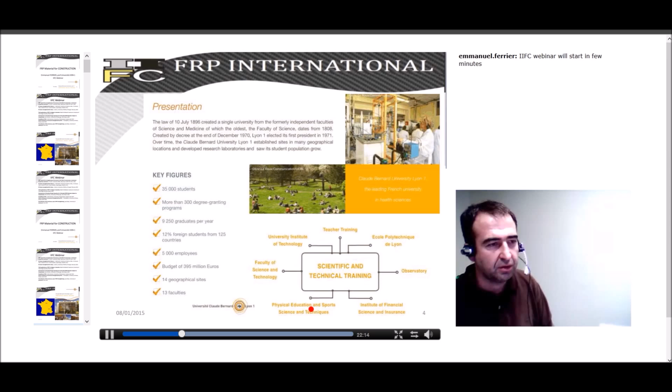About our university, we are located in Lyon, in the southeast of France. It's a quite big university in France with 35,000 students. Essentially, the university is well known in the field of health, less in the field of technical. There are some international opportunities in our university, and a lot of possibility for funding, essentially for European people, for example. So keep this in mind if you are maybe interested in visiting us.

About our lab, we are a small team. I'm in charge of this lab. The team is made of 11 persons, essentially associate professors, and we are working only in the field of FRP material for construction. Today I would like to speak about FRP material at first, about mechanical properties. I will try to go quite quickly on this part, and to focus more on bond issue and try to make a small literature review and give you some new results we have on this topic.

So to start with FRP, I think that we have a small community today. You are all aware about FRP systems used for shear strengthening, flexural strengthening, confinement. These materials are well known in the field of construction nowadays, essentially to protect old structures or to upgrade structures that need new strengthening because of overloading. It can be used also to solve some problems about design mistakes, for example. And for seismic application, there is also a good application to make structures more safe.

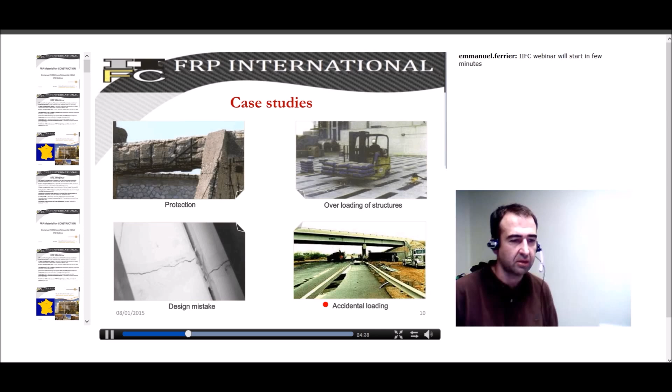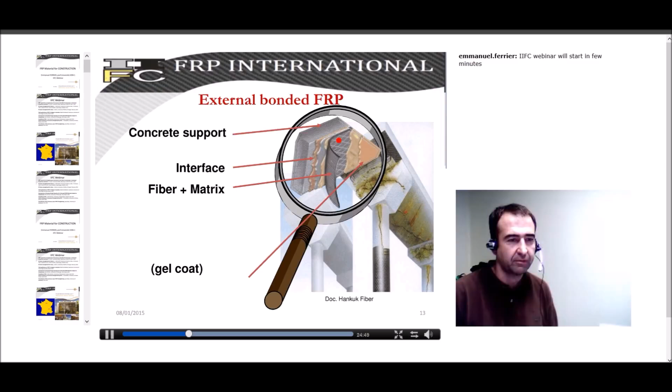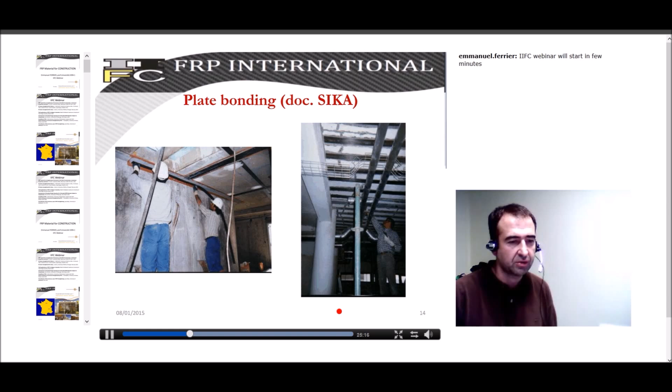So generally when we use FRP, it's unidirectional fibers bonded onto a support using a polymer, but I think you are aware about this. This technique is well used in a lot of countries, and in France there are about 7 to 8 companies that apply about 50,000 square meters of carbon fibers each year, essentially in buildings and a few applications also on large dams and bridges. We have some photos about this kind of application, some large machines to apply the polymer and so on. So this is only an example in France.

So about FRP materials, I will try to go quick on this part because there are not so many people connected.

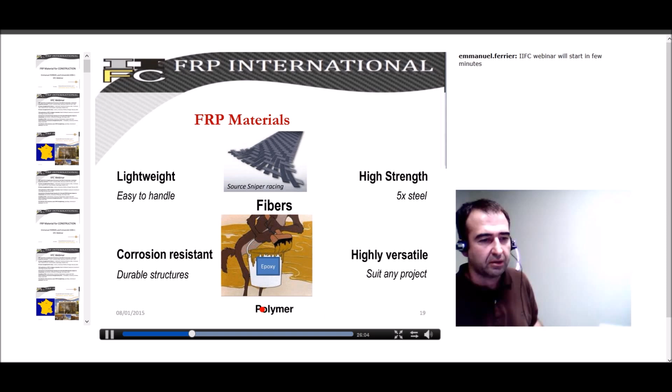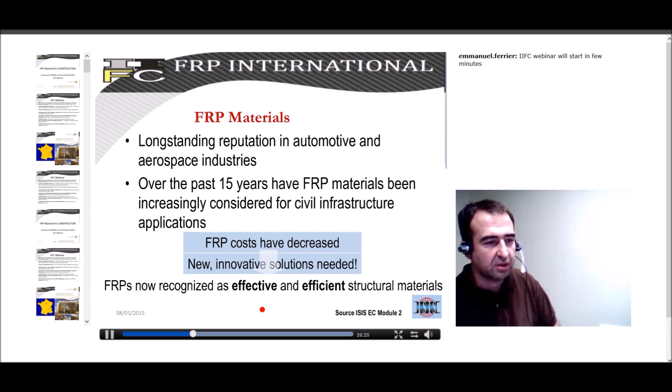You all know that FRP materials are light, high strength, corrosion resistant, and can be used on all surfaces, which makes this material very useful in the field of concrete structures. These materials are well known in other industries, such as automotive and aerospace, and the development of this material has grown higher each year for about 15 to 20 years, and now it's quite common in the field of construction.

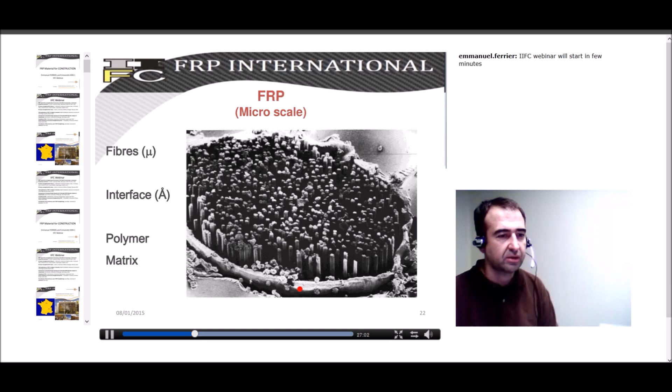FRP material is made of fibers, mainly carbon, because people started with these fibers, but also glass and a few examples with aramid fibers. The matrix is essentially epoxy, and the material you get is made of a lot of small fibers that play the same role as steel rebars, but with lighter properties.

So about the fibers, you may know that carbon fibers, high modulus or high strength, are commonly used. Generally, if we compare this to steel properties, the main issue is that we have a higher tensile strength, but a lower Young's modulus.

And for this reason, the first fibers that have been commonly used are low modulus carbon fibers. Nowadays, for some specific applications, e-glass, even if its Young's modulus is lower than steel, seems to be quite good to dissipate more energy, and we'll see this in some large applications about seismic retrofitting, for example.

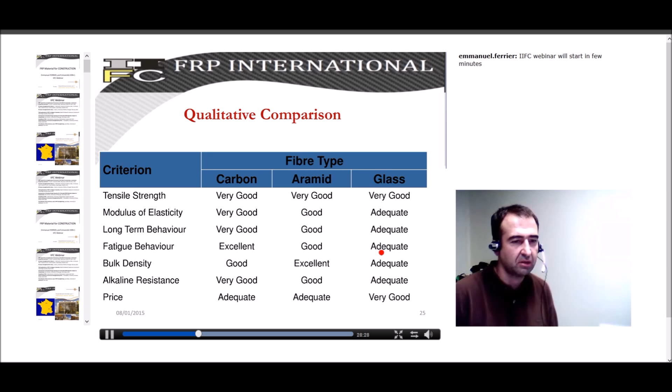If we look at these three kinds of fibers - carbon, aramid, and glass - carbon has very good properties for all the mechanical and physical properties we may look at. Glass is also good, but the problem is the low Young's modulus of this material, along with long-term creep sensitivity and fatigue, which is less effective than carbon.

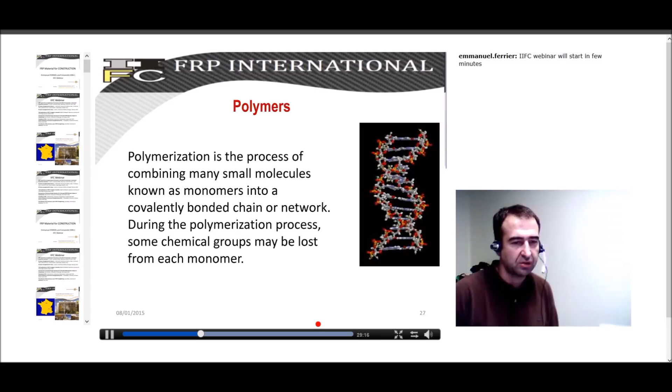So about the polymer we use - polymer is a specific material well known in the chemistry industry, but generally in our field it's less known. A lot of misunderstanding occurs because polymer needs to be handled very carefully and specifically. There is a polymerization process that should be clearly understood. It's like concrete - we need some days, specific temperature, and specific humidity to get the perfect chemical reaction and the good material at the end.

The main typical property people need to understand is the temperature sensitivity of this material. If we compare this to concrete, we know that concrete is full strength and full hard once we mix cement and water, and the mechanical properties don't really depend on temperature. In this specific case, temperature changes the mechanical properties of the polymer.

You have a range of temperature where the polymer is thermoset, with a glassy plateau where the mechanical properties, essentially Young's modulus, are constant. Then there is a decrease to get to the rubbery plateau where the properties exist but are very low, much lower than the initial one.

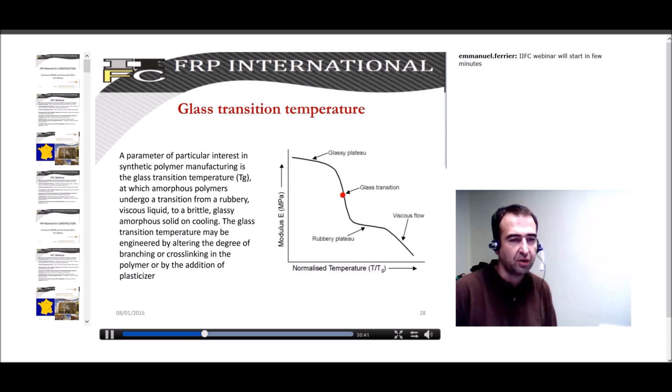This may be compared to the material used, for example, to build a road - material coming from the petroleum industry, and it behaves in different ways depending on the temperature. So we identify a value, the glass transition temperature of the polymer, corresponding to the value where the mechanical properties decrease.

So a common thermoset polymer used in our industry is epoxy, used for wet layup applications of laminates and dry fibers. It's a very good material for adhesion and bonding - we'll see this in the second part. Vinyl ester is also used, but more to build FRP rebars and for thermoset applications. It's less expensive, and used for building FRP by pultrusion.

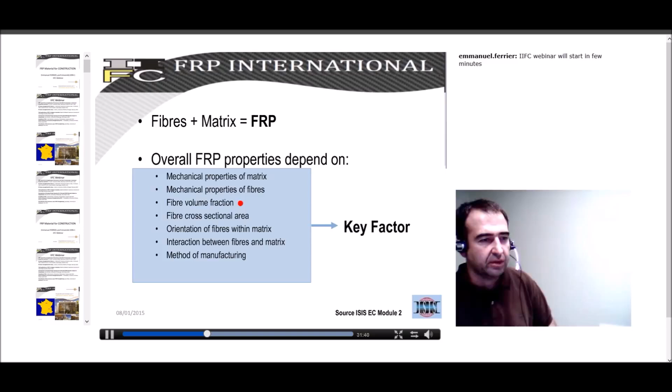So FRP is a mix of fibers and matrix, and the mechanical properties of FRP will depend on the matrix, as I mentioned, on the fibers, but also on the amount of fibers in the mix and the adhesion. So if we look at the mechanical properties, you have to understand that the mechanical properties of UD fibers are given, and you can have very good fiber properties.

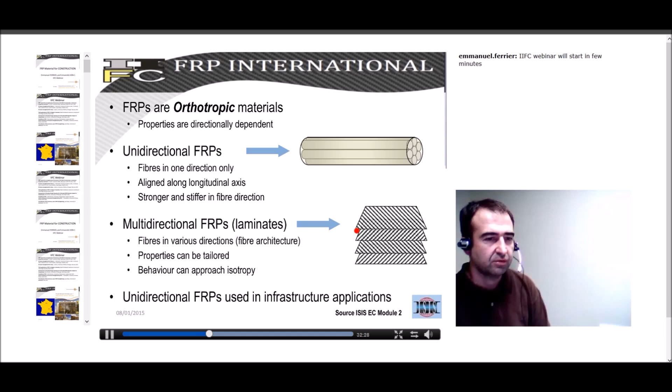And then you will have two things to understand: the fibers are bound together, so there will be the issue of physical and chemistry properties of the surface and the interface between the fibers and the polymer. And then you have the laminate, meaning you will have a lot of layers, and all those layers have to bond together perfectly.

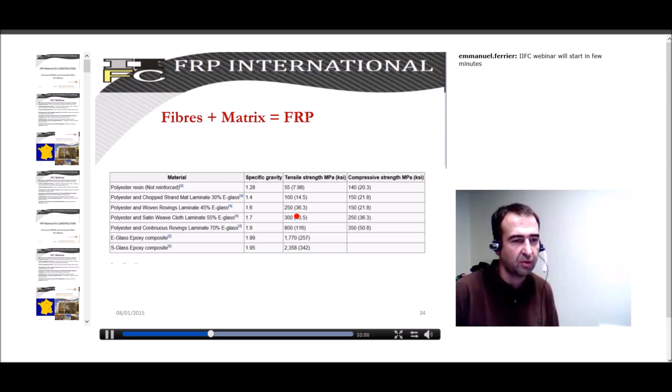If we look at the mechanical properties of the resin, you can observe that generally the laminate and the mechanical properties of the FRPs essentially depend on the mechanical properties of the fibers themselves. This means that polymers are just there to make sure that all the fibers are bound together and that all the fibers work at the same time in tension.

So those materials are applied by the wet layup method. Dry fibers are bound onto the support, and an epoxy polymer is used to impregnate the fibers. It can also be bound using polymers.

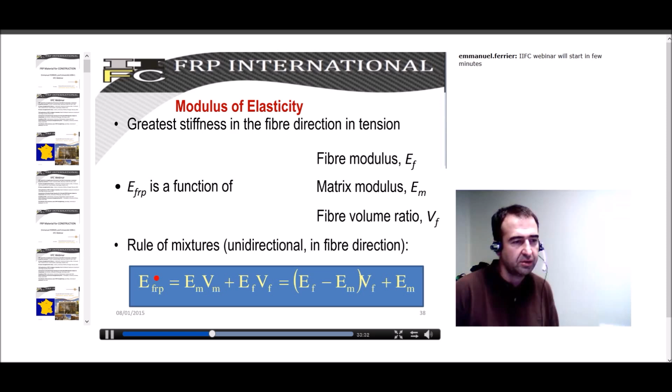About properties, as I mentioned first, the Young modulus can be easily calculated using mixture properties. This means that your final properties will depend on the matrix properties and the fiber properties. If we compare the Young modulus of the matrix and the fibers, you can observe that even if we have 70% of the FRP made of matrix, the mechanical properties will essentially depend on this ratio - for example, carbon fiber Young modulus is nearby 200,000 megapascal. If we compare it to a usual epoxy, it's only 3,000 megapascal. So the difference is nearby 100.

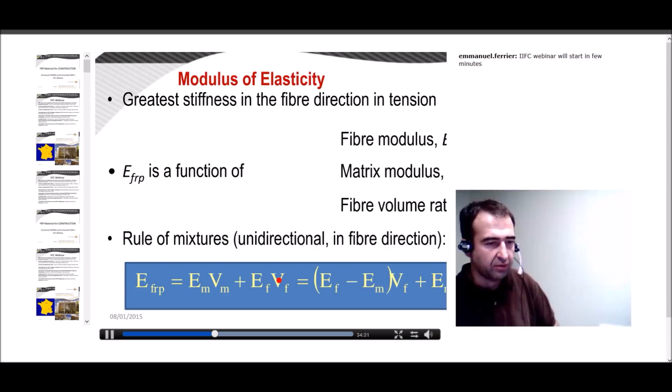So the mechanical properties of your FRP will depend on this value, and of course this one too. If your ratio is very low, your final properties will be very low as well.

So then, generally we identify the mechanical properties assuming perfect bonding between the fibers and the matrix. This is not often the case - there is some problem in certain cases between matrix and fibers. This is well known and well identified, and it's quite common now to get a very specific treatment of the fibers so that there is a very perfect bonding between these two, allowing you to calculate mechanical properties considering usual elastic properties of all the constituents.

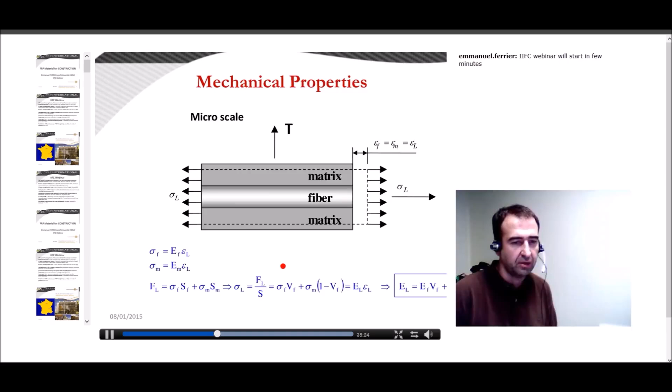Then about shear - when a fiber is fully impregnated by the matrix, there is a bond issue between fibers, and there is a strength property to identify: the shear strength that can be developed around fibers, to make sure that two layers will be fully bonded.

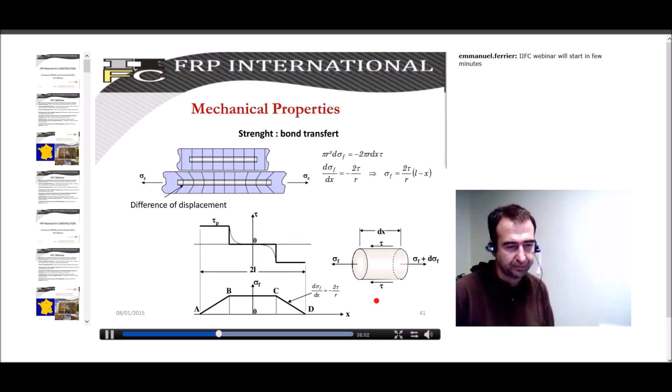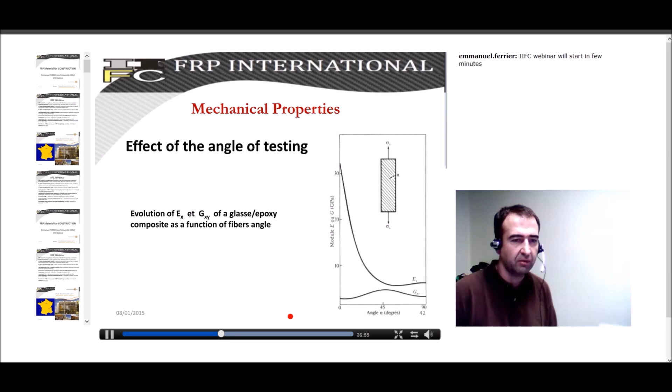Another thing well known in this field is that when we use unidirectional FRP material and test it in another direction, we rapidly lose the mechanical strength for a very, very low angle. The decrease in Young modulus or strength is very high, so this material should only be used in its own axial direction and not another, which can be a problem mainly for a full FRP system. But in case of strengthening, generally the fibers are bound in the direction where the force is applied.

So to sum up the mechanical properties, you have here the stress-strain relation in tension of fibers and matrix - I mentioned there is a big difference. If you clearly observe, you can see that the FRP material will have a final property that depends on the amount of fibers and matrix you put in, and also the initial properties of both.

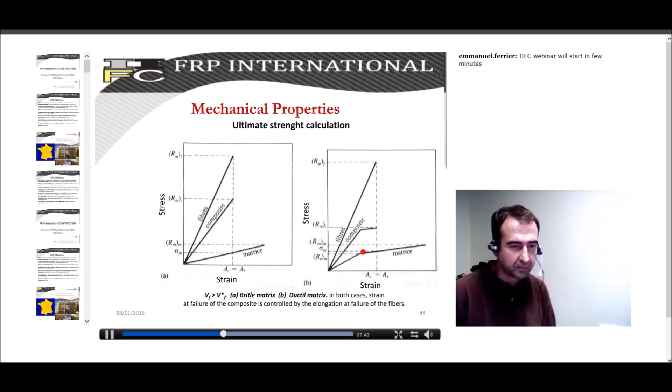For nonlinear behavior, some developments have been done in this field recently. This can be obtained depending on the matrix properties, but also on mixing fibers with different behavior.

For testing material in our field of construction, it's quite well identified now. Generally everybody uses this ISO norm for tensile testing. There is also an ASTM standard, which is a little bit different in its sizing but quite similar in principle. Coupons are made of unidirectional material, and then tested directly in tension.

Some people ask about the durability issue of these materials, and this is a result coming from our lab testing. We got questioned about FRP durability from the French nuclear agency, EDF, who were wondering about using this material for strengthening some big buildings and chimneys in nuclear power stations. They asked us to make some tests with quite difficult weather conditions.

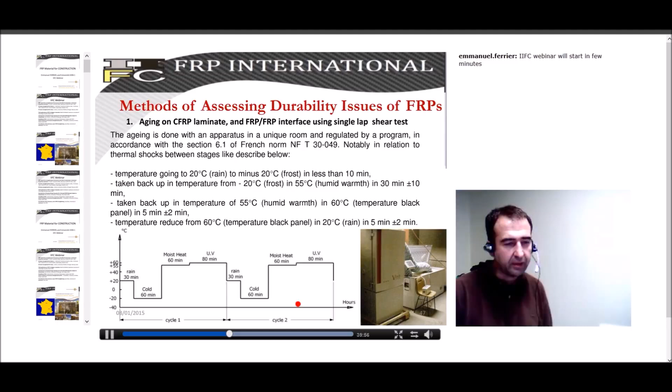At first there is full water immersion for 30 minutes, then freezing at about -20 degrees for an hour, then heating to 60 Celsius degrees, then UV exposure, then rain again, cold, heating with moisture, dry heating - repeating this cycle 300 times. This is, I think, the only norm I found for accelerated testing of this material. It's commonly used to test painting material, and we have used it for several FRP materials.

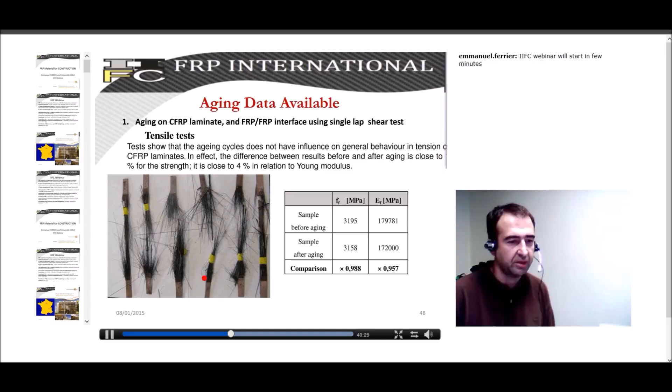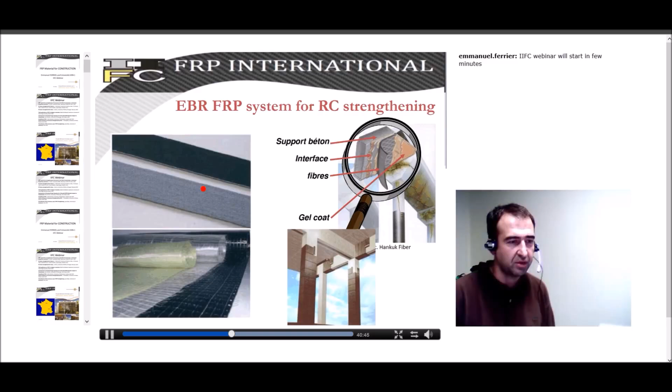What we found is that if we compare the ultimate strength and the ultimate Young modulus, we didn't find any modifications on the coupons we tested in the lab. We made about 100 tests and didn't notice any difference before and after the aging, and the aging was quite difficult. Brahim Benmokrane will introduce some durability issues about this, and we are quite confident on the durability of the FRP itself. But as I mentioned, this material is bonded onto a support, and generally it can be bonded with two types of material: laminate material, prefabricated, or different sheets directly bonded onto the support.

So now the issue is not only to test the material, but to evaluate how it will be applied on the support, depending on the worker applying this material and the weather conditions, and so on. We are worrying about how to identify the mechanical properties of the FRP onto the concrete.

So this is the next step of my presentation about the bond issue. Bond is important for a beam because when you strengthen a beam with FRP for flexure, this can only work if perfect bond adhesion between the FRP system and reinforced concrete is assumed. It means continuity of strain between the steel and the FRP. Another important issue is that at the end of the FRP system there should be no debonding, because if there is debonding of the laminate, the system won't work anymore. So bond onto the concrete substrate is very important.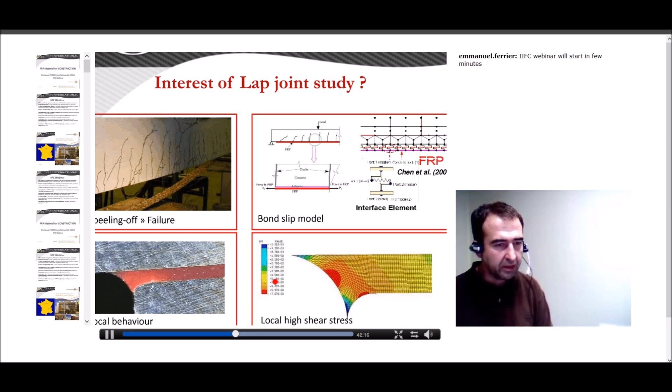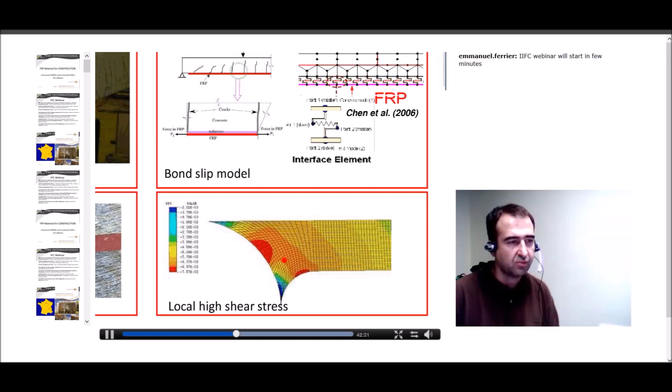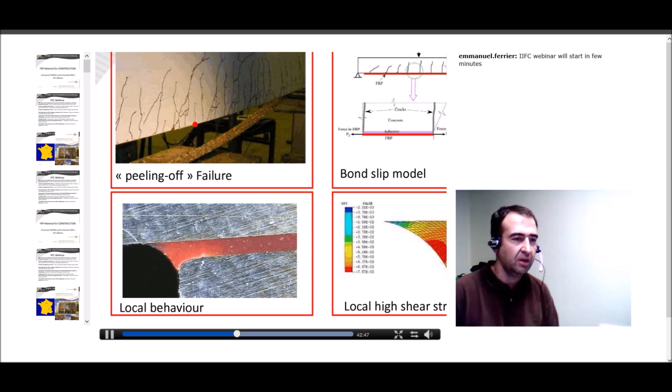About this, there has been a lot of development. This comes from the aeronautic industry and mechanical research - we know that at the end of the lap joint there is important stress, essentially because we have two different materials bonded together with different mechanical properties. This image shows that shear is the main issue and the main problem, and this shear, generally in reinforced concrete beams, is known to cause full delamination or peeling off of the structures.

In order to identify this, there has been a lot of development and modeling to try to understand how this interface behaves and to identify its mechanical properties. This is the next step of my presentation - I will show you how researchers try to find and identify the mechanical properties of this interface.

Since 1992, the first research developed this kind of compressive shear test. This test has completely disappeared - we don't find it anymore.

We have some single lap shear tests. It's quite commonly used, but it's quite difficult to apply in certain cases because you can have flexural behavior, and the mechanical properties are quite difficult to obtain.

Then Täljsten, for example, developed this kind of single lap shear test. The sample is connected to a block, and a compressive force is applied here and a tensile one here, so that shear develops in the interface.

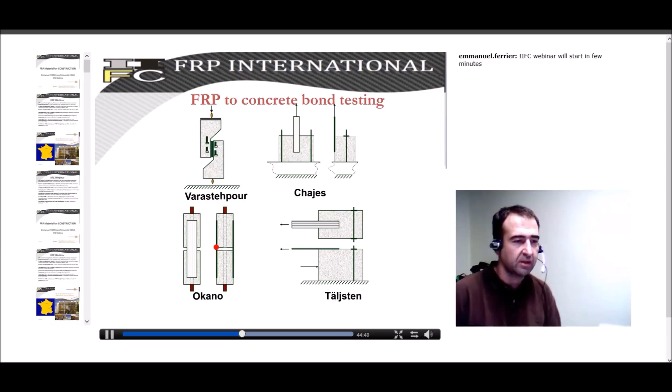Another common test is the double lap shear test. Two concrete blocks are connected by FRP material. Then tensile stress is applied onto the concrete, and due to the tensile force developed in the FRP, you get shear developing in the interface.

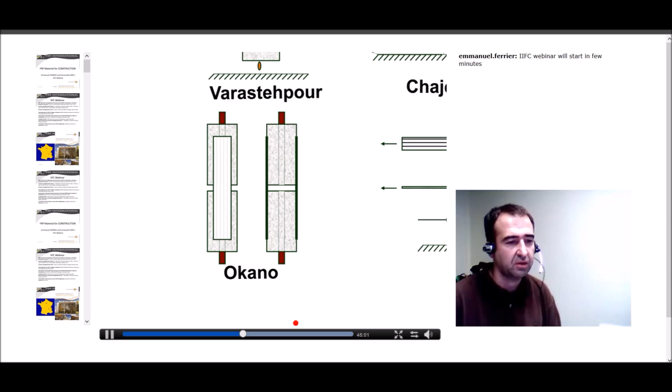The first author that used this test was Okano in 1995. It's quite a long time from now, and this kind of test has been widely used by other authors.

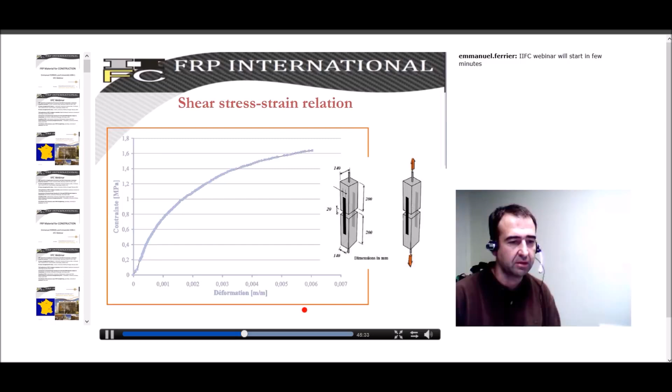Going back to the literature review, the first test reported in papers was from Täljsten in 1997. This was the single lap shear test I mentioned, and the test was developed for FRP bonding but also for steel bonding - at that time steel plates were still used for reinforced concrete strengthening.

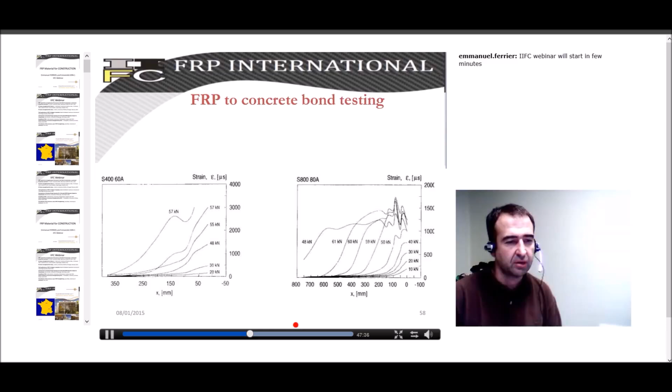You can observe the author catching the debonding here, where the full stress was developed, and this whole zone is debonded, leading to failure. But in the elastic stage, the bonding length is not so long - we only need 100 to 200 millimeters to bond this material onto the support. This is mainly due to shear transfer. There are also some old studies done mainly in the field of aeronautics, by authors like Volkersen or Hart-Smith.

When we use a very basic equation, shear is due to difference of displacement with two materials, steel and concrete for example, and the angle of rotation is commonly known as the shear strain. Basically, you can write those equations with equilibrium between two sections, and this allows you to calculate the shear stress depending on the length.

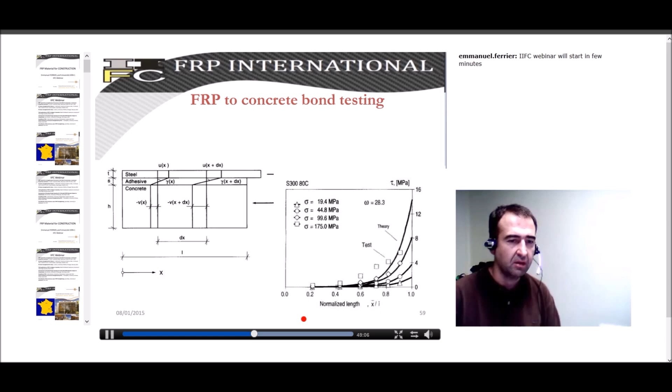If you do this calculation and compare it to the strain, it's very well developed in the field, in the paper from Täljsten. You can observe that you have a very important shear stress decrease for just a few centimeters of bonding. This is also a problem because locally you have very peak stress, important stress, that can make some specific mechanical disorder for the failure.

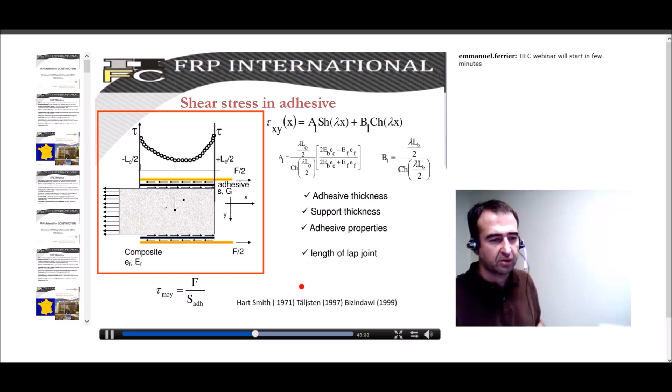This work done by Hart Smith has been developed again by Täljsten for the concrete FRP problem. Bizindawi works on it, and a lot of specific equations have been developed on this topic. You can find them in the literature review quite easily.

More recently, other authors have worked on very local bond slip mechanical laws. All those authors have shown that if you look only at the peak stress area, if you focus your study on this area, you are able, based on experimental study, to show that the bond stress against the slip can assume this kind of law, a nonlinear law with a decrease which corresponds to the beginning of the debonding. They have identified this kind of mechanical law.

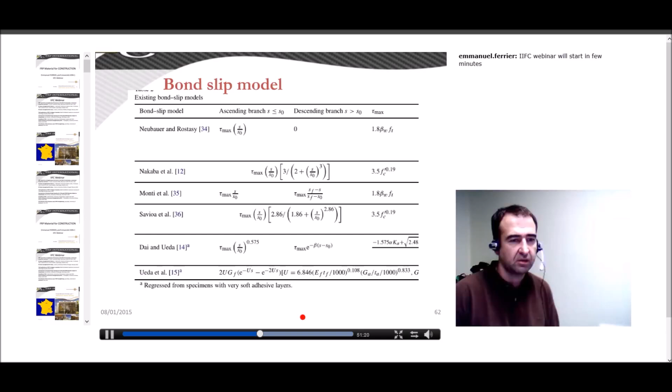Depending on the authors, you will find several proposals. I have summed up in this paper, this is the problem, sorry, the paper mentioned here, and this paper sums up all the equations proposed by different authors. They have clearly observed that the maximal value can basically depend on the concrete strength. Based on this, they have proposed some mechanical relations to calculate the ultimate load that you need to design such kind of bonding properties.

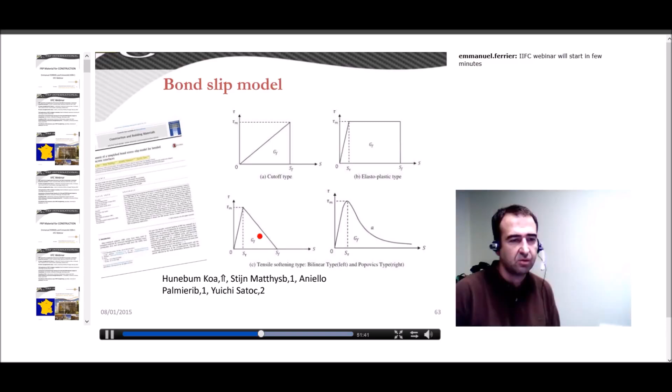So depending now on the design, there are several mechanical laws. Generally this value is correctly assumed, and also the G factor is proposed in several papers, so that you have some bond slip model that can be used after that.

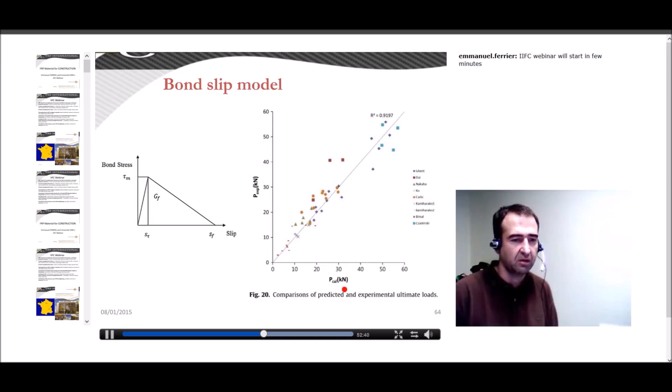A comparison has been done by Stijn Matthys, and Aniello. This study is very interesting because you compare a lot of tests. If you have to develop some bonding issue, I recommend you read this paper because you have a lot of results coming from the literature and a comparison between the ultimate calculated value and experimental one, clearly showing that all the calibrated models are quite good, depending on the test and depending on the fitting you get. But we can observe that there are quite very good results, whatever mechanical relation is used for this.

Then, what has been done using these properties: Shalal and Chen, also Kenneth Neale at University of Sherbrooke, have tried to use this kind of local bond slip model into structural analysis. With FRP, interface behavior needs some specific relation for the interface model, and for this the calibrated relations proposed in the literature have been used to investigate if this bonding issue can be modeled at the level of the structure to catch essentially the problem of failure, which is an important issue for the strengthening of beams. Both these papers are very interesting.

So now we have seen that under static load, this problem of bond is quite well identified. There have been a lot of other studies about creeping behavior and fatigue issues. When you strengthen a building, such as a parking slab for example, on this slab there will be creeping load, and you will also have fatigue load due to cars. The main problem coming from the engineering field is the evolution of the material properties, and whether the evolution of the bonding, for example, will affect the structural behavior.

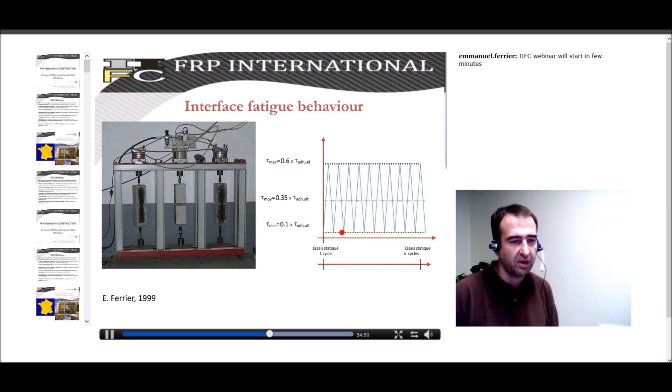So, for example, I did this work during my PhD some years ago. You have these concrete blocks tested in shear for 1 million cycles. The fatigue was done between 60% of the failure and 10% of the failure for 1 million cycles. This test is the double lap shear test that I described before.

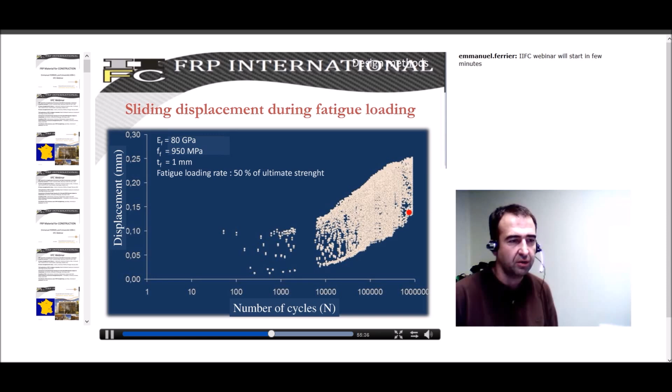You can observe here the results we got. We can observe that depending on the level of strength, there is quite slight, no real evolution of the mechanical properties until we reach 100,000 cycles, and then there is a slight increase of the slip. Here the slip is increasing, but at the end, even if the slip increases, we didn't get failure of the concrete. When the test is done after 1 million cycles, you have the static loading here. This picture is quite old.

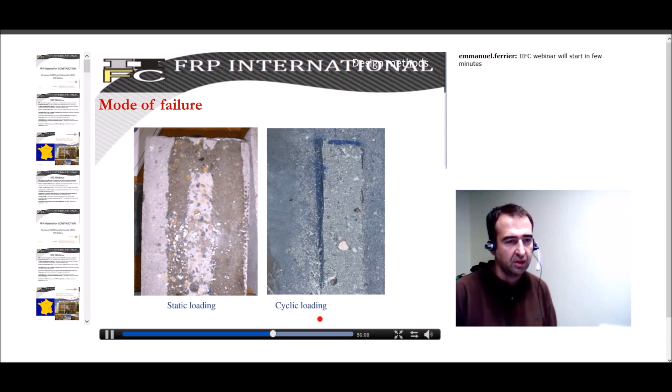What we observe is that we have some decrease in properties in the adhesive because the failure mode changes between a cohesive and a non-cohesive failure. For this, it was very interesting for us to see the mechanical decrease and the fatigue.

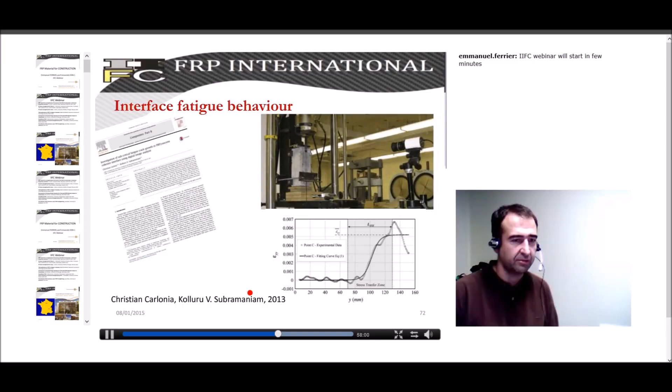Other tests were done this time by Christian Carlonia. This is an interesting paper because it observed the fatigue process with a non-destructive, full field image analysis, allowing us to get the strain along the bond length. You can observe here that the bond length again is very short, only about less than 100 millimeters, and they observed this all during the fatigue issue. This study is also very interesting if you are interested in the fatigue behavior of the adhesive. At the end, what we have when fatigue is concerned is interest in getting the ultimate stress strength, the strength of the material, depending on the number of cycles.

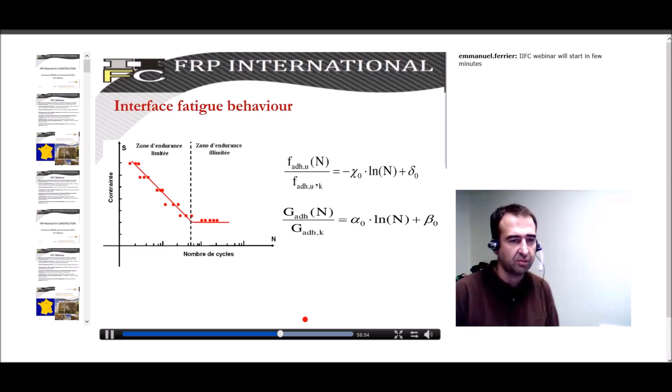For designers and engineers, this value is interesting to know: what is the limit of stress you should have on the FRP to avoid any fatigue debonding. In the literature, you have some equations such as this one, like Wöhler curves, that propose some constants, of course depending on the process and the system you are studying. There isn't so much, but there is some proposal allowing us to know about the fatigue behavior.

Then the second issue which is interesting to focus on is the creep issue. This was part of my work during my thesis also. At that time, we were interested in getting the full master curve of an adhesive using the time-temperature principle, basically based on the Williams, Landel and Ferry hypothesis that it's possible to get the full creeping relation.

Using short-term tests with different temperatures. The idea here is that during a short period, a temperature gives you a creeping curve. If you increase the temperature, you will accelerate the creeping problem, and the creep will increase. When you increase the temperature again, you get several curves. Those authors, in the 1950s, showed that it's possible, if you translate all of these single curves, to get the full master curve of a polymer for a reference temperature.

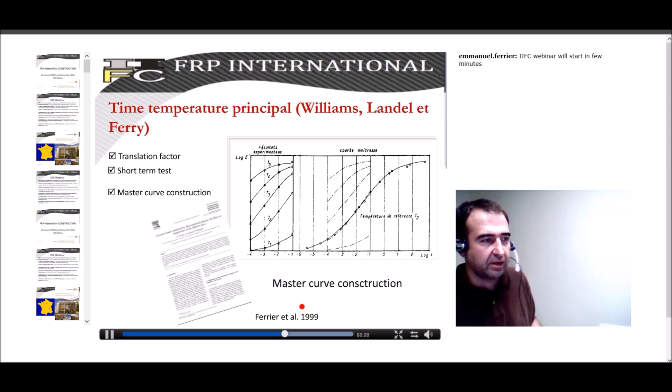So we used this idea on lap joints made of epoxy polymer and carbon fibers. Here you have all the shear properties of the adhesive obtained from 20 Celsius, then 25, 30, 35, and so on, until we get a real decrease of the mechanical properties. Then we translate all of them to get the full evolution of the shear in function of time. Basically, when you have this, you have the creep function for several temperatures. We compared this with long-term tests, and this has been published, and it works quite well.

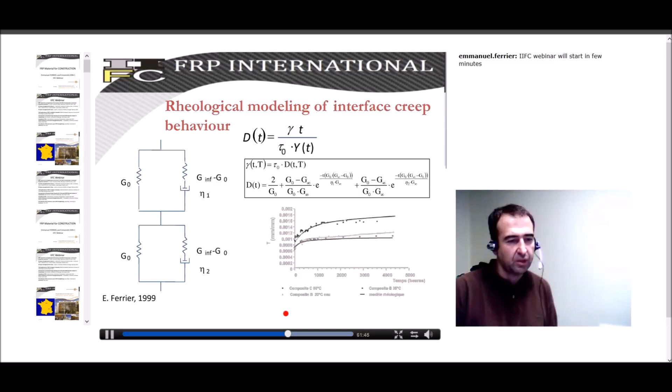At the end, what's interesting is that if you use a specific rheological model, you can fit your parameters in comparison with the experimental data. Using this, you're able to get the shear strain evolution depending on the initial shear stress and the creep function you have. What we imagine with this is that the creep strain, the shear strain, depends on the instantaneous strain and the creeping one. This means that if you identify the initial shear strain in the adhesive, if you apply constant stress, and if you know how this strain will change over time, you're able to fix the minimal value.

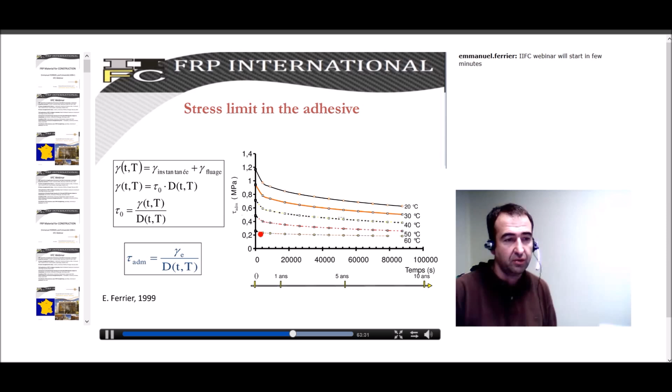Of shear stress you should have in the adhesive to keep your lap joint elastic. This was the idea, to fix an allowable shear strength limit to get this kind of figure here, depending on time, level of strain, and temperature. You'll have the limit in stress you should have in the adhesive, to avoid getting nonlinear behavior, to keep your adhesive in an elastic stage. If we observe this value, for example at 20 Celsius degrees, our conclusion was that we should limit to 0.7 megapascal the serviceability limit stress in the adhesive, so that we avoid any debonding over a long time period. But at higher temperatures, the limits should be much lower.

Since then, and more recently, there have been other studies done about creep. There is one that I found and think is also very interesting work done on small specimens. This is maybe the only problem about this paper: the specimens are very small and the size effect can be questionable. You can see here the testing device allowing to apply the shear.

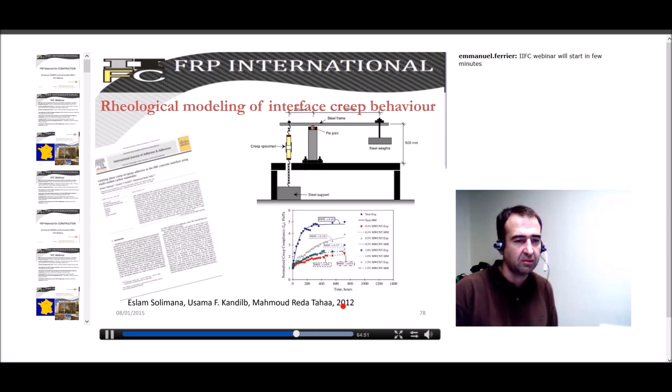What is interesting is that the modeling has been done as I have done, and they have also proposed to try to improve the creeping behavior using nano carbon particles that can be used in several kinds of polymer used in the field of aeronautics to improve the creeping behavior. These authors conclude that it can be very interesting to use some new polymer to limit the problem of creep in this adhesive. So this paper can be very interesting also, and quite a new paper.

The problem that we found is that temperature dependency is quite important when we look at the problem of creep. More recently, two years ago, we started to combine the problem of thermal properties dependency and the problem of loading. It means that the adhesive is sensitive to temperature: shear modulus decreases and there is a change in shear strength. Due to change in temperature, this can also induce displacements between concrete, FRP and adhesive, because all these materials don't have the same thermal expansion factor. This may induce internal stresses and some additional shear stress that have not been studied.

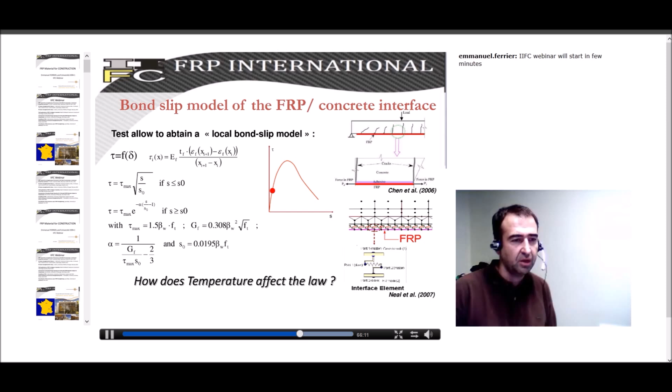So what we have done is try to identify, about the local bond slip model I mentioned before, how temperature can affect this. I mean, all the proposed equations I mentioned before - are they only good at 20 Celsius temperature, or are they good for any current temperature? This study is very recent. I presented it at the CICE conference in Vancouver last summer.

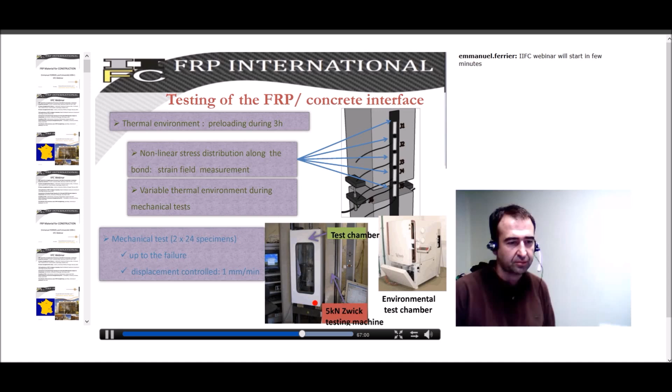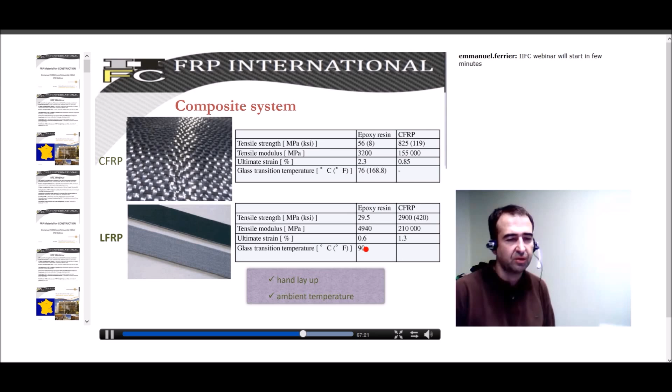What we have done is combine stress and, in a heating chamber, temperature. We tested about 50 samples with different temperature conditions, and we tested two different FRP systems. To identify the way strain decreases along the bonding length, we bonded several strain gauges, allowing us to get the full strain in the FRP and then the load transfer. In this study, a wet layup system was used with carbon fibers, and laminates were also bonded onto the surface - two different properties. This one has a quite high glass transition temperature property, which was very interesting in this study.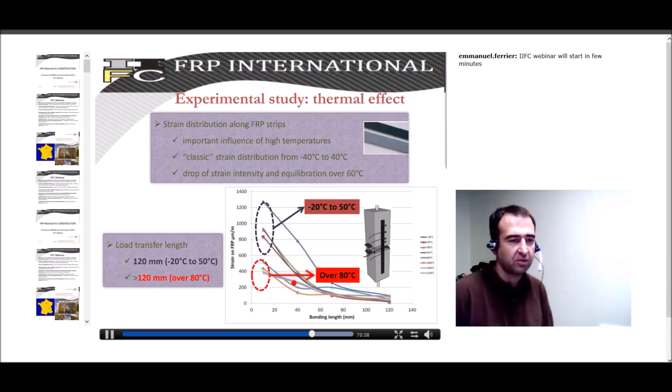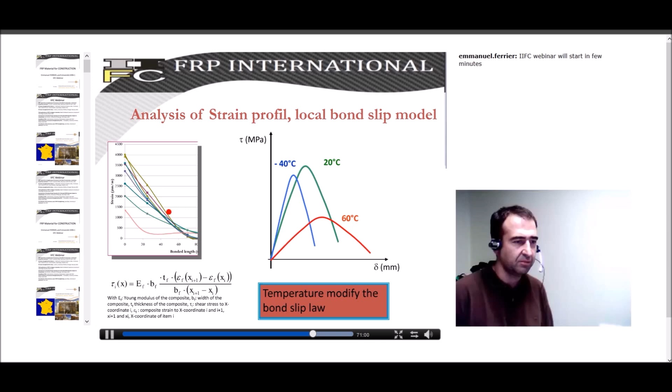For the other system, the same observation can be made, with different values. You can see that very low temperature locally increases the strain. That may explain that we get some initial internal strain that may create some debonding before the loading, and then the behavior becomes very smooth when we increase the temperature - nearby the glass transition temperature, we are below it but very near this value. So temperature modifies the local bond slip model. That is our main conclusion and main issue about this, because the local bond slip model essentially depends on the strain profile you have.

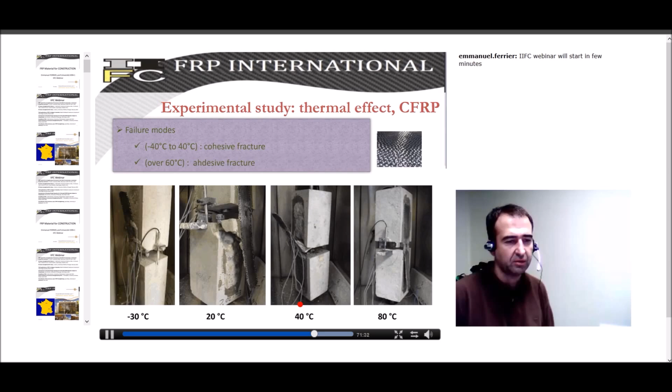About the failure mode, here you have the test at -30. You can see that the system, all the concrete blocks, are frozen. The test was done with temperature and loading at the same time, in a thermal chamber. Then when the temperature increased, we get a very non-cohesive failure with full debonding on the FRP system.

Same observation with laminate: cohesive failure, then non-cohesive failure at 120 Celsius degrees. So the main parameters that should be modified to consider the temperature effect are the GF value, the value of beta depending on the bonding length, and also the factor alpha.

So these works done are quite new for us, and now we are working to try to build a new model to introduce the temperature effect in the bonding.

In fact, if we don't do this, you can see here, for example, one model which works quite well, coming from Yao and the team of Teng. These authors published a model that works very well.

When you observe this, you can see that for low temperature, the values at failure are overestimated, which can be quite dangerous. For common temperature ranging from 0 to 40 Celsius degrees, it's quite good. But since we increase the temperature, for values not so high, 60 degrees, the previous calculated value is very far from the results.

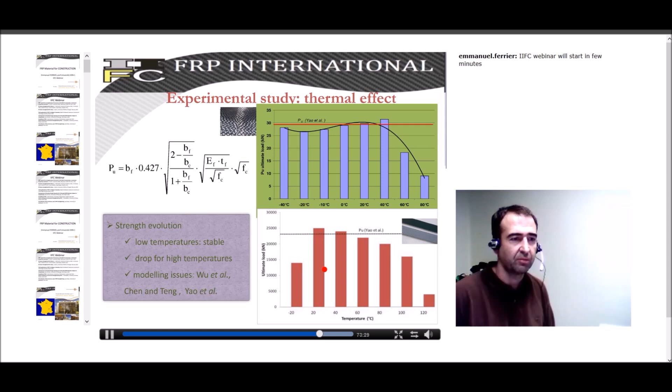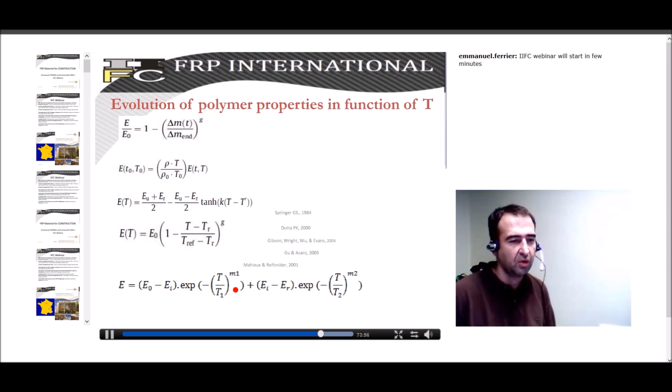So we went back to modeling and tried to see what existed in the literature. We found a lot of models about bond issues in literature, quite old models. All these models try to introduce temperature in the shear behavior to model the mechanical properties.

If we look, for example, at Hart Smith, a researcher coming from aerospace who works a lot on bonding problems, he introduced the idea that there can be terms in the shear stress distribution due only to thermal problems, and also plastic strain due to local debonding.

He calibrated all these constant values depending on the variation in temperature, difference in the value of the thermal expansion factor, and conductivity of the material.

Basically, depending on those calibrated values, if we use his model and try to identify the ultimate load based on our results, we can observe that this model doesn't work. It means that when the temperature increases, the ultimate load should be much higher than the one we observe in his model, and if we compare to the obtained results, it's very different.

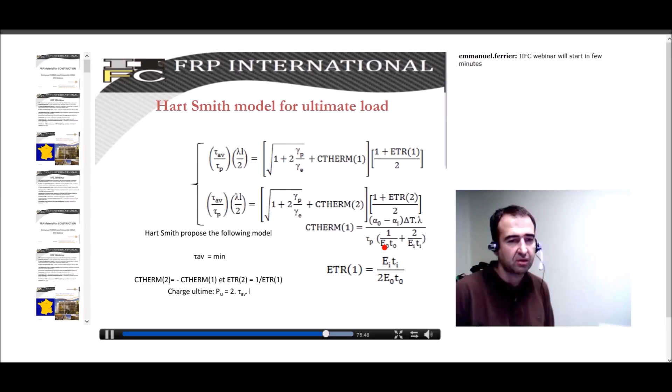In fact, the problem is that Hart Smith worked on thermoset polymer, and the temperature was much far from the glass transition temperature. This means all his model have been calibrated on the glassy plateau. It cannot be used in our condition because in this term you have the Young's modulus of the epoxy polymer, and this value is not constant because it depends on the temperature.

So we have done several tests only on epoxy coupons to identify the mechanical properties of epoxy as a function of temperature. Basically, if we correct by introducing a temperature dependency of the factor in the model, the calculated values are more clear and very close to the experimental values.

We can even observe that when low temperature is introduced, a decrease in the ultimate load is noted, mainly because there is internal stress in the FRP due to the non-dilatation of the FRP. The thermal expansion factor of FRP is nearby zero, while concrete and epoxy increase in strain due to the change or reduction in temperature. The internal stress in the adhesive creates premature failure.

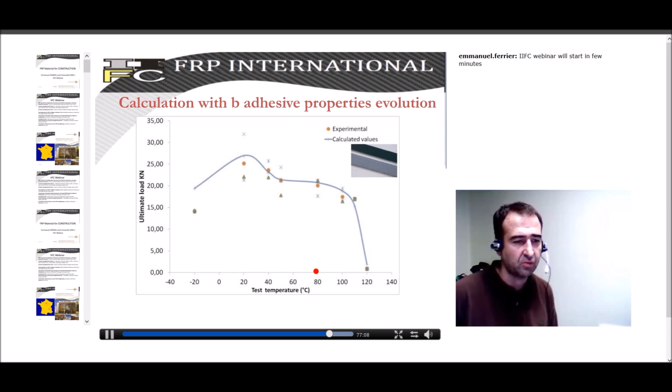This load is the mechanical load we apply to get the failure of the specimen, not considering the internal stress we have due only to the change in temperature.

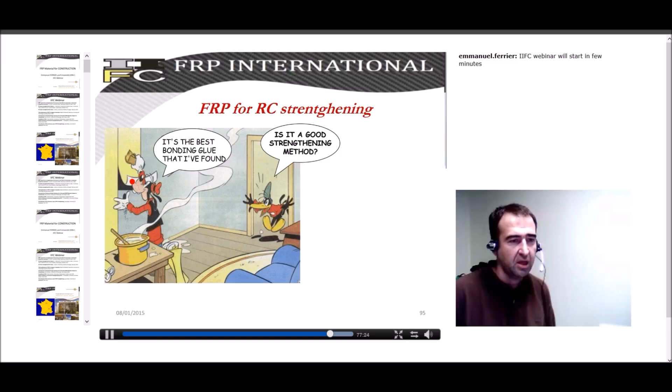So at the end, I think we are nearly at the end of the presentation. We have a better view of how to bond those very nice materials onto concrete, and this material is a very nice way to strengthen structures. I think you are quite all confident about it. But otherwise, even if the mechanical properties are well known, there are also other factors.

To finish, I want to just mention another paper I found quite interesting to outline. You have this paper—I didn't mention the authors, sorry, but I can send it by email if anyone wants it.

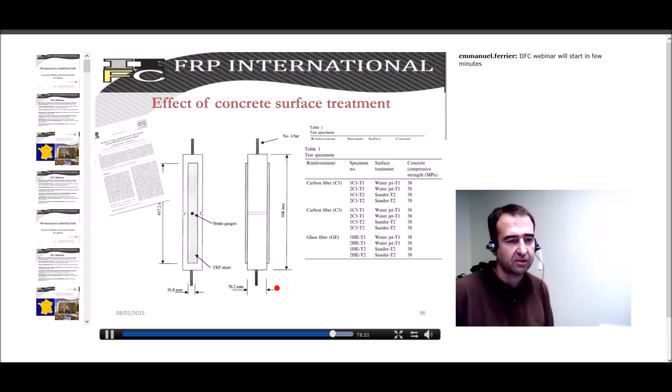This author has studied the effect of surface treatment. All the surface treatments recommended are water jets, centrifugal, and there is also a mechanical surface treatment. This author compares different surface treatments to identify their effect.

As you observe, it seems that sanding is not the most efficient way to prepare the surface. With the same system, if you use water jet, you can observe that the ultimate stress you achieve is much

higher than the one obtained by only sanding the surface. It means that the bonding is more complex than we thought, that the concrete preparation should be looked at very carefully, and maybe such surface preparation should be introduced in the model, because until now, nobody really cares about how the surface is prepared. We need to prepare it, but don't really know if this affects the ultimate bonding load.

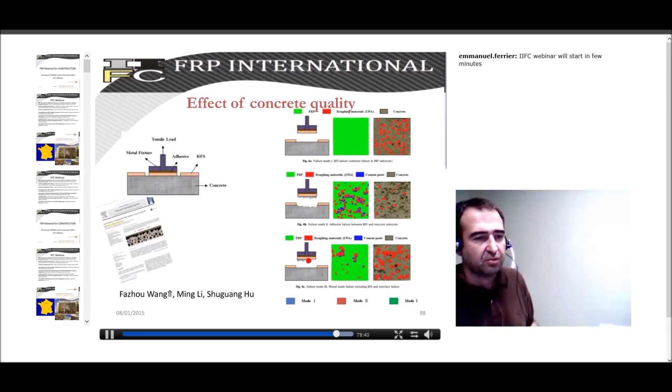There is another paper that is also very interesting, introducing the concrete quality and its porosity. If you have a lot of aggregate, different sizes of aggregates, and cement paste, this is a different surface that has been prepared. You may have different failure modes and also different failure values.

This paper is very recent and very original, and proposes something new that I didn't know about: aggregate size depending on the ultimate load. This author has shown that the larger the aggregates, the lower the ultimate load at failure you will get, essentially because of this small graph showing that depending on the porosity of the surface and the amount of cement paste, the strength of the bond is completely changed.

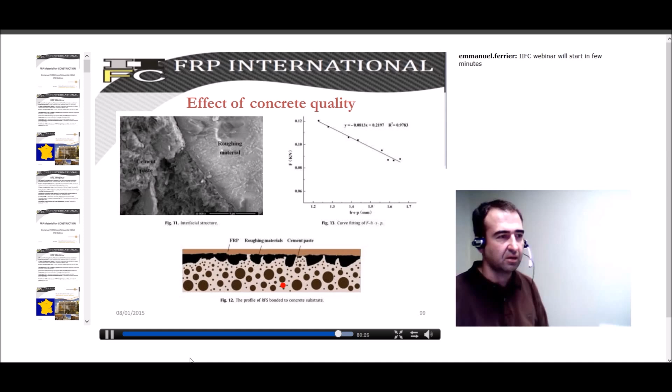So to go to the conclusions, we have shown that FRP materials are efficient, well-known materials. The bond issue is very critical and may need to be studied a little bit furthermore, mainly about concrete substrate. Fatigue, creep, and thermal behavior is already studied. Some additional research could be done in this field, but we are quite confident in the field of fatigue and creep issues.

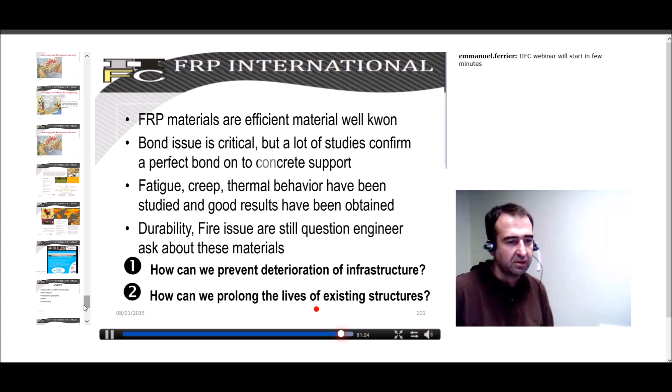Durability and fire issues are always a question from the engineering field. People are always aware about durability and fire, but the more the material is used in the field, the more confident we become. So the next step is to see how we can strengthen bridges in hope that we don't have such events. The next webinar in this field will be given by Enzo Martinelli next week at the same time.